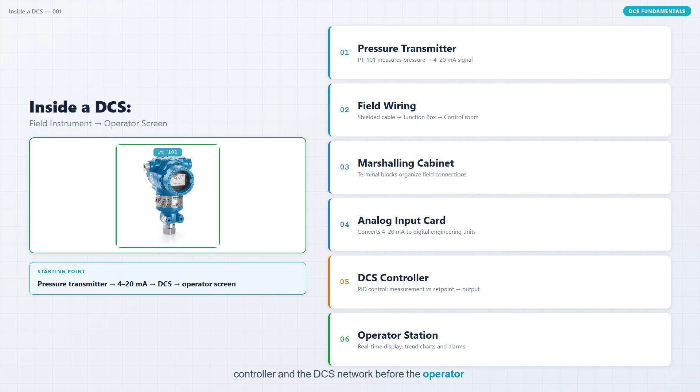Your pressure transmitter starts a complete signal journey through field cables, marshalling cabinets, an analog input card, the controller, and the DCS network before the operator finally sees the process value. The journey starts with PT 101, calibrated for a range of 0 to 16 bar. 4 milliamps represents 0 bar and 20 milliamps represents 16 bar.

The 4 milliamp value is called the live zero. It tells the DCS this is a genuine zero reading, not a broken wire. A signal below 4 milliamps indicates an open circuit or wiring fault. At 12 milliamps, the pressure is halfway through the span, 8 bar. Every pressure value within the calibrated range produces a proportional current.

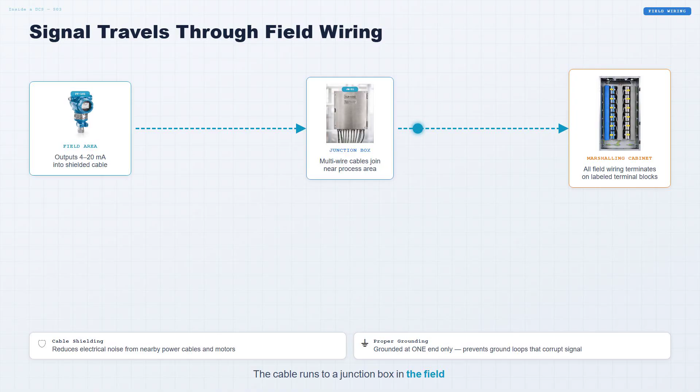The transmitter sends its 4 to 20 milliamp signal through a shielded instrument cable. The cable runs to a junction box in the field, where multiple instrument cables are collected. From there, a multi-core cable carries all signals to the control building. Correct cable shielding and grounding practices reduce electrical noise and keep the measurement stable.

The field cable enters the marshalling cabinet. This cabinet organizes all incoming instrument connections using labeled terminal blocks. Cross-wiring routes each signal to the correct DCS cabinet. Depending on the installation, the cabinet may also contain safety barriers, isolators, or surge protection. This arrangement simplifies testing and future maintenance.

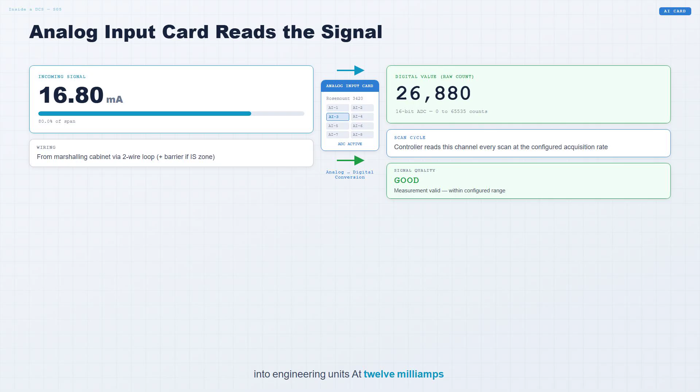The signal reaches the analog input card. The module measures the incoming current and converts it to a digital value. The DCS then scales that value into engineering units. At 12 milliamps, 50% of span, the result is 8 bar. A quality indicator is also attached to every measurement, showing whether the signal is valid.

The controller PIC 101 receives the pressure value from the analog input. It compares the measurement with the configured set point. The controller calculates the required output according to its configured control action. When pressure deviates from the set point, the output changes to bring the process back to target.

Quick check. If the field cable from PT 101 develops an open circuit, will the DCS still receive a valid pressure reading? Think about it. The answer is no. The analog input enters an open circuit or underrange condition. The DCS marks the measurement as bad quality and applies the configured fail-safe strategy. It must not be used as a valid pressure reading.

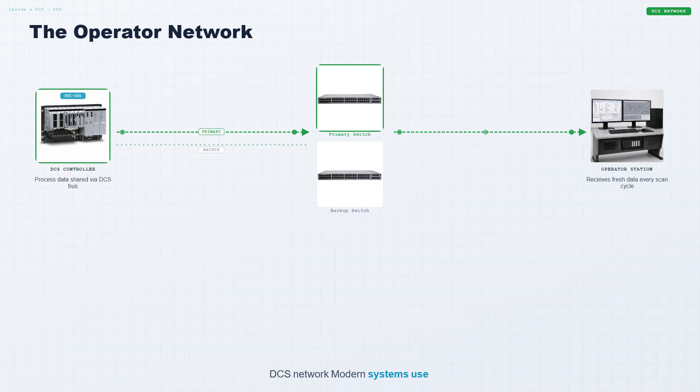The controller shares process data through the DCS network. Modern systems use redundant communication paths. In a correctly designed redundant system, the backup path maintains communication if the active path fails. Operators continue receiving process information without interruption.

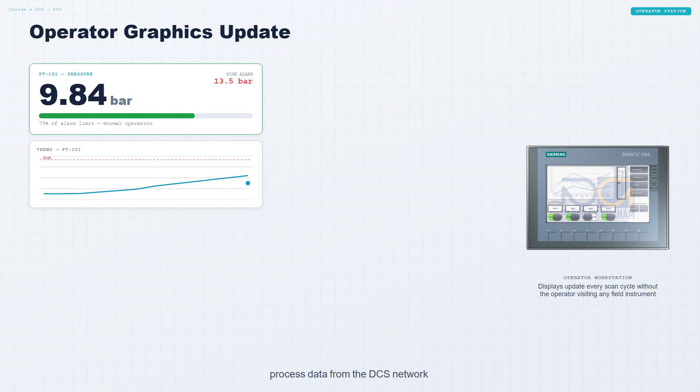The operator station receives fresh process data from the DCS network. Measured values, quality status, and trend history all update together. Operators can see whether the pressure is in alarm and whether the signal quality is good, all without visiting a single field instrument. The controller also sends output signals to control the process.

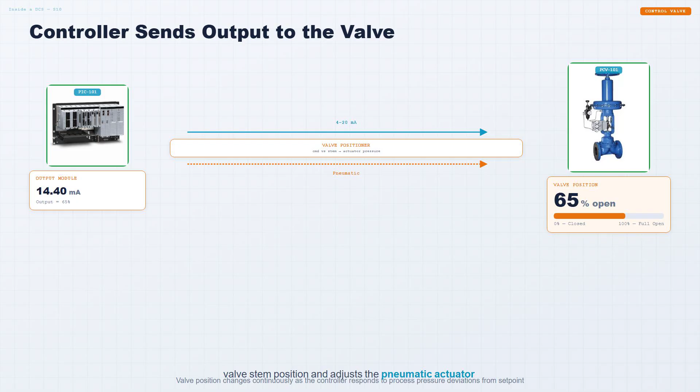PIC 101 sends a command to the analog output card. A 4 to 20 milliamp signal travels to the valve positioner on PCV 101. The positioner compares the requested position with the actual valve stem position and adjusts the pneumatic actuator until the valve reaches the command. This forms the closed control loop.

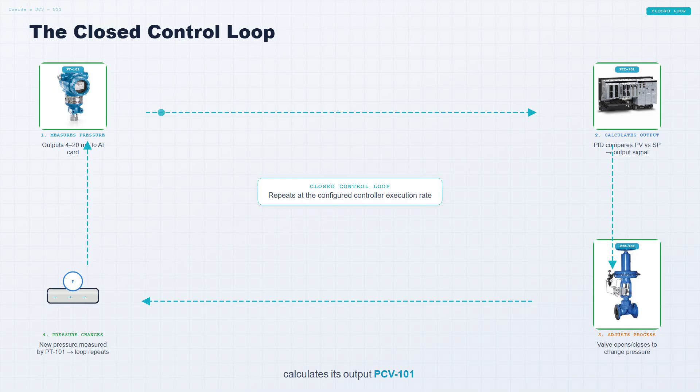PT 101 measures process pressure. PIC 101 compares the measurement with the set point and calculates its output. PCV 101 adjusts to move the pressure toward the target. PT 101 then measures the new condition. This measurement and correction cycle repeats continuously at the configured controller execution rate.

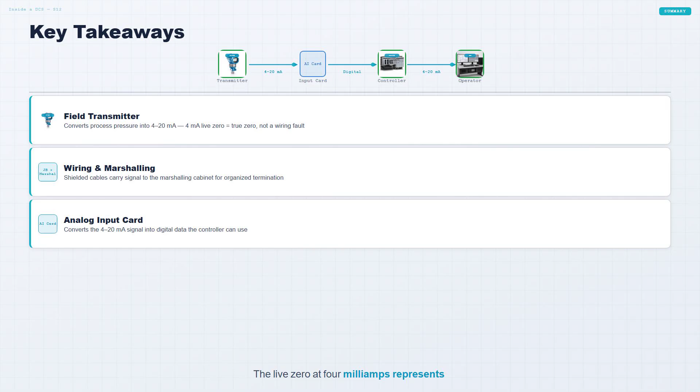PT 101 converts process pressure into a 4 to 20 milliamp signal. The live zero at 4 milliamps represents true zero, not a wiring fault. The marshalling cabinet organizes every field connection before it reaches the DCS. The analog input card digitizes and scales the signal.

PIC 101 compares the measurement with the set point and controls PCV 101 through the valve positioner. The operator station displays real-time values and quality status. This is a conventional hardwired DCS architecture. Modern plants may also use remote I/O or fieldbus, but the measurement, processing, and control journey remains the same.